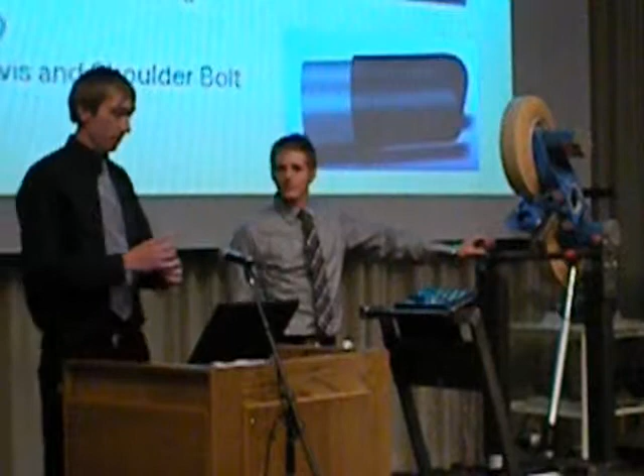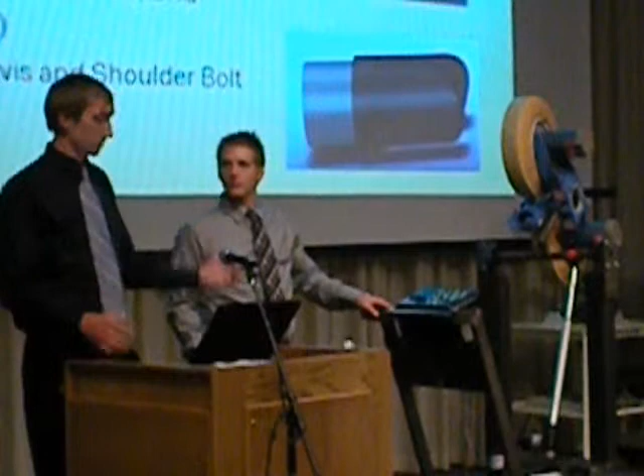So the support for the pitching machine was, we got our beams that I was pointing out, and then the rotation in the middle is, we have a shaft going through there that allows it to all rest on there. There's two bearings on the top and the bottom of that base plate, which we call it, and those bearings make it so that the shaft doesn't move at all, because it has all this weight on it with sort of different bad angles that make it hard to rotate. So the double bearing makes it so the bearing doesn't fall out of its handle.

The shafts are 1.25 inches thick, and we got all these pieces from Baumgart. They're generally tractor parts, I believe, but we just used 4 of those bearings. We also used 2 of them on top for the other rotation.

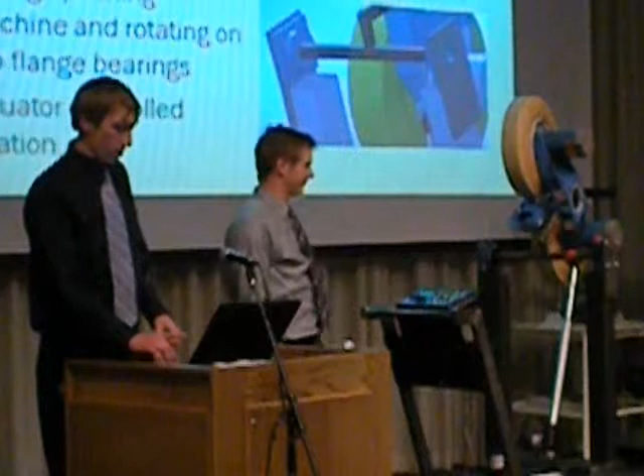And the actuator is what controls the rotation around the bottom. We call this one the horizontal actuator for how it's positioned. And it can extend, it goes just around the bearing so that it doesn't hit it, and then also will be underneath it so it's out of the way.

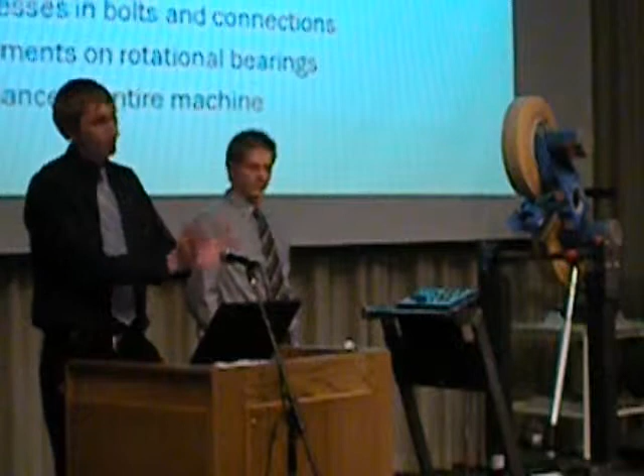In designing these actuators, we had to take into account a lot of different factors to find the best setup that won't break, and it'll also be able to get our full range of motion. We wanted the horizontal to be the full 90 degrees of the field, and then also the vertical motion, we wanted to go from about -15 to just below 45 degrees for full span to get the furthest distance in the field.

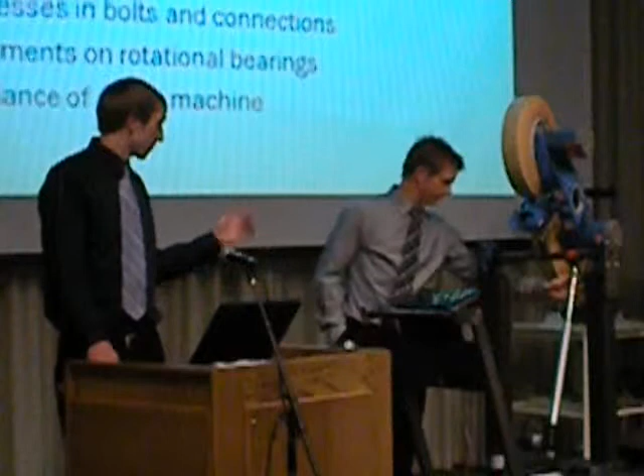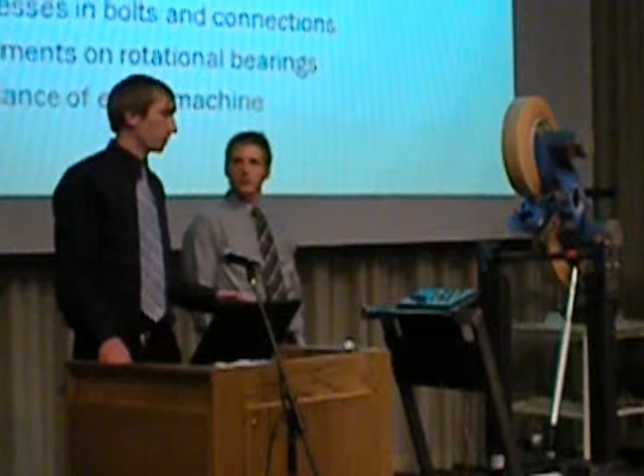So through this we did calculations with our MathCAD program, and we're able to calculate the forces that would be exerted along with the different geometry that would work with the setup of the actuators that we had. We have the 18-inch stroke actuator for the height, and then we have a 6-inch stroke actuator for the horizontal one, with different load capacities. One is about 600 pounds for the bottom one and 485 for the top one.

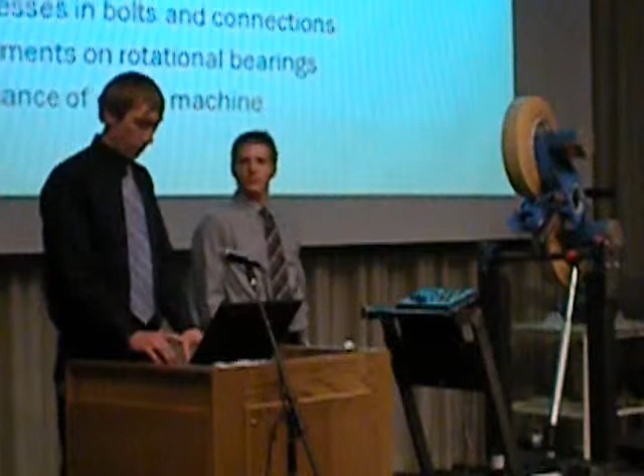We also calculated the stresses in some of the key parts, such as the connection between the vertical actuator and the pitching machine. It has to go at a bunch of different angles, and it has to hold the whole weight right on the connection. So we calculated the stresses and determined a factor of safety of at least 2. We just put 2 in there because that was our goal, and we met that.

Okay, I'm going to go into some of the electrical design. I split my design into basically 5 main components, which include the microcontroller and programming, interface and enclosure design, power design, wireless control, and other mechanical controls.

First off, the microcontroller and programming. I used a Motorola microcontroller and programmed it in assembly language, and it basically is the brain of the pitching machine, and takes instructions from the user and puts them out to tell the machine what to do, where to throw the ball and when to throw it.

Secondly, the interface and the enclosure. You can see the enclosure strapped here on; that's pretty much my work right there. The interface is on the front and readily accessible to the user.

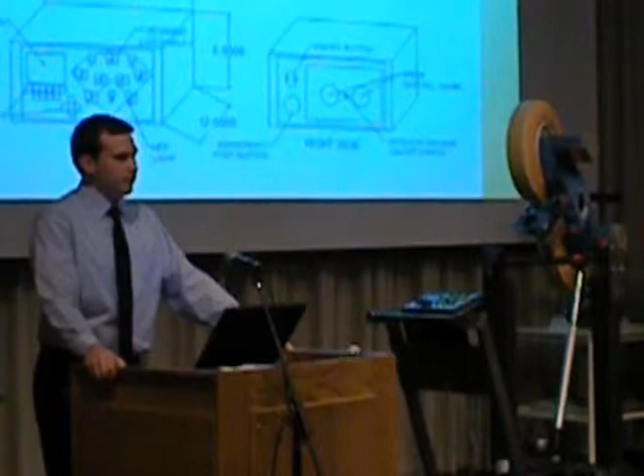The main features on it are a fairly large LCD screen, which is used as a menu to tell the user where they are in the program and what their options are. It also has several buttons, lights, and some LCD digits which inform the user of various things.

They're located on the baseball field. You can see it also at the bottom of the screen. The buttons and such are located at each of the positions on the baseball field so that it's easy to know, for example, if you want to throw the ball to center field, just press the center field button.

It also contains the panel from the old pitching machine, which allows you to use the same options that you had before, like the speed knobs and the switch to turn the machine on and off. And the box also contains all of the electronic and power equipment that goes with the electrical design.

Next, I'll talk about the power design and the wireless control. The power design uses two power supplies, which supply plus and minus 5 volts, 12 volts, and 24 volts, which basically just do various functions. It also has fuse connections on each of those voltages and an emergency stop button for safety.

The wireless control we wanted to develop so that while you're out in the field, you can tell the machine when to go and when to stop, so that you don't have to run back to the machine every time you want it to pitch another ball. What we found is a transmitter and receiver pair that have a range of over 500 feet, which was important because we wanted it to be accessible from the whole field, which is just over 300 feet at the outfield walls.

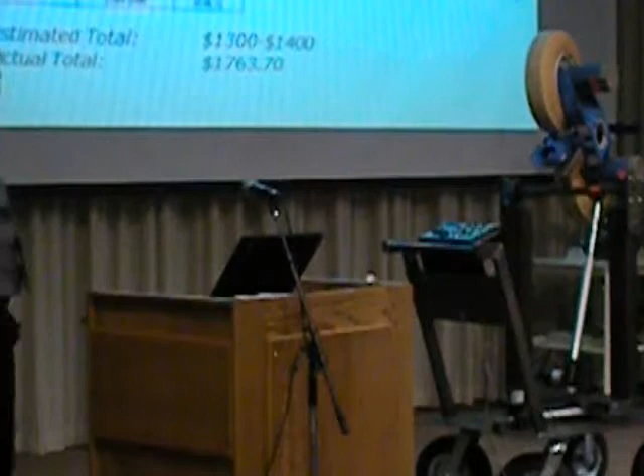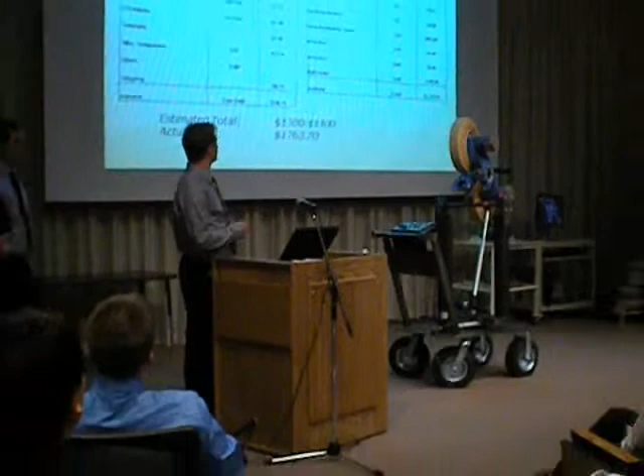Yeah, all right. A few things that helped us out is we had, like Brian said, some things that we accounted for costing money, like the actuators, but they ended up actually being donated. So that's very nice. They're donated by Link.

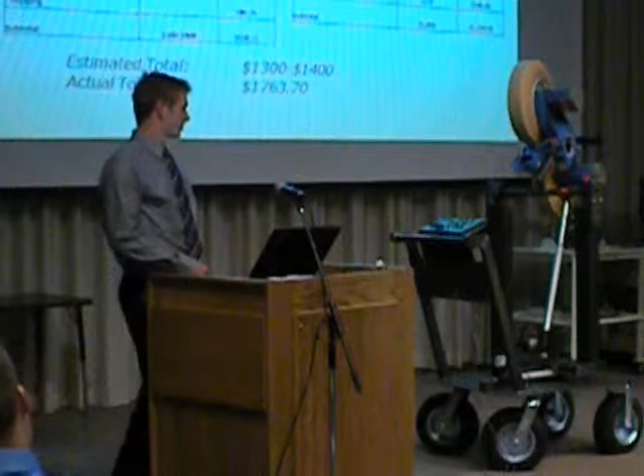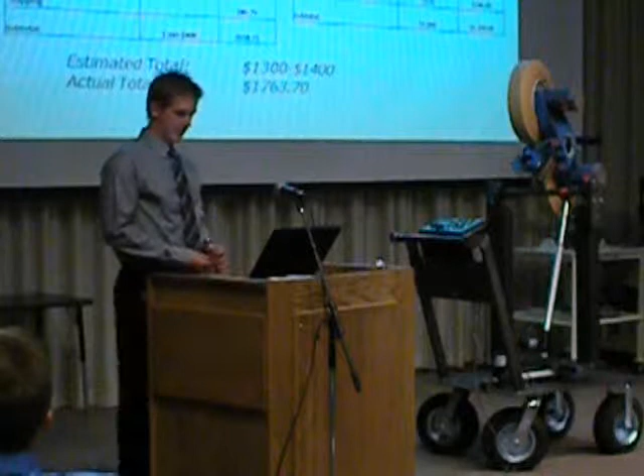And one thing we originally accounted for is that we thought we were going to make the parts, but once we started designing, the parts became a little too complex and out of our machining ability, so we had to take them elsewhere. So that cost was a cost we didn't initially prepare for. And as you can see, Brian showed you the rest. Now to the acknowledgement.

We'd like to thank the engineering department